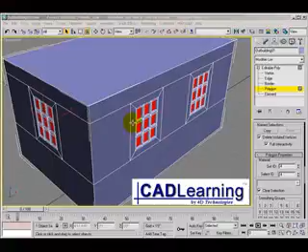Let's improve the look of our window frames by making them project away from the wall. The reason we didn't extrude the window frames out from the wall any earlier was it would have made getting the selection sets around the window opening more difficult. By leaving these flat or flush against the wall, we could more easily grab our edges needed to define the center lines of our mullions. So now is a good time to project the window frames from the wall, and then we'll apply a bit of a chamfer so they'll show up better when lit in the final scene.

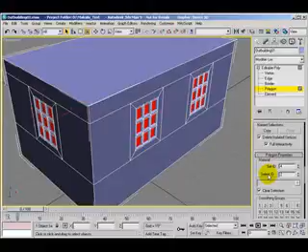First thing we need to do is select the window frames. We know how to do that - it's at polygon level, and if we think back, we have already assigned material ID number 2 to those window frames. So here I can set my select ID number to 2 and click on Select ID, and the window frame polygons are automatically selected.

In the Edit Polygons rollout, we can use the Extrude modifier. We'll use the Settings button - 10 inches is a bit too much. Let's edit that to be projecting 2 inches. In this particular case, let me hit enter.

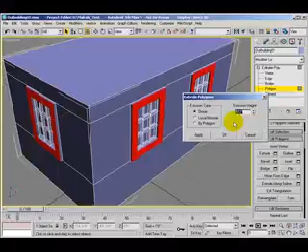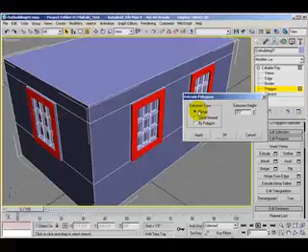In this particular case, I definitely do not want to pick by polygon. Here, the whole group is being extruded as a single polygon object. If we did by polygon, each of these segments would form a line, an edge we can't see - actually 2 edges - because this would be treated as a polygon, this as a polygon, etc. So 'group' is the correct method to extrude all these polygons representing the window frame.

Click OK. Then we'll go to the bevel tool to give the windows just a little bit of a chamfer. Let me zoom in a little first.

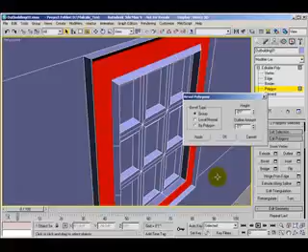Select the Settings button for bevel, and because of the negative height number, it's being drawn back into the building. That's not quite right - we could do that if we wanted, but it doesn't make a lot of sense. If I set positive 1 inch in the height, maybe that's a little too much. So let's change this to a positive number, 0.5 inches. Enter. Now it projects out a half inch.

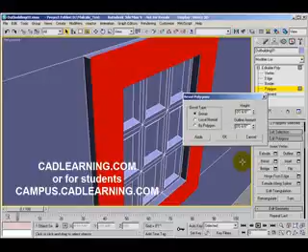I'll right-click, copy that from the numeric field, highlight my outline amount field, right-click and paste. And of course, if I hit enter, that's not quite right because that splays the frame out a little bit larger. So I need to add the minus sign here and press enter. Now I have a half inch chamfer all the way around my window frames.

I click OK, zoom back a little bit, and that extra chamfer is going to help catch the light when we apply materials to our building.

That's it for our windows. We have assigned material IDs as we built, and we used the tools we needed to create the windows within the wall - 3 windows pretty much simultaneously, very fast, very efficient.

I'm going to exit sub-object mode by highlighting the word 'editable poly,' and I'm going to press Control S from the keyboard to save the file.